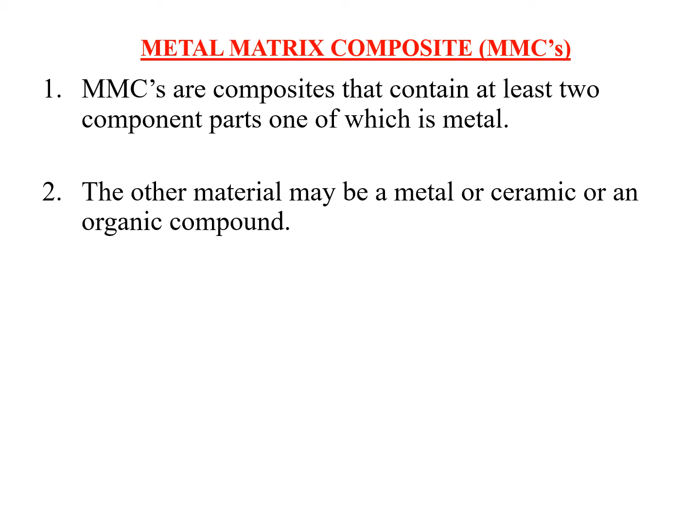So MMCs are composites that contain at least two component parts, one of which is a metal and the other material may be a metal or a ceramic or an organic compound. So it is made up of dispersing ceramics such as oxides, carbides, or metals like lead, tungsten, and a metal matrix which is usually aluminum, magnesium, iron, cobalt, or copper. Apart from this, most metals and alloys can be used as a matrix for this type of composites.

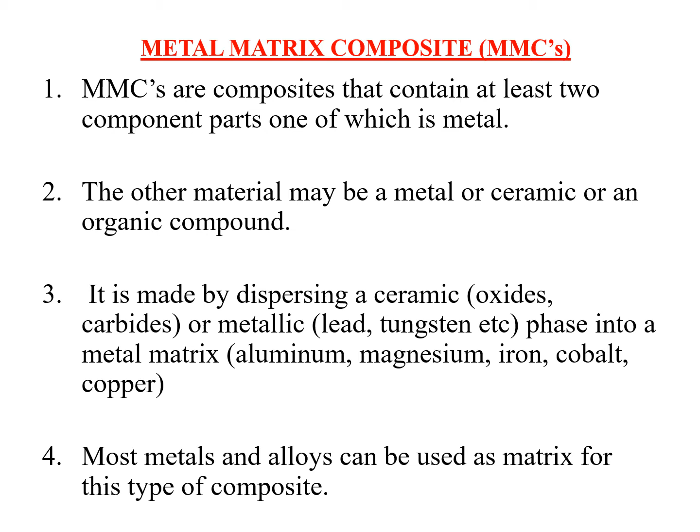So we have already studied what exactly we mean by matrix, what is reinforcement, and what is interface. So I hope you remember what exactly we mean by matrix.

So next are the properties of metal matrix composites. So MMCs offer properties such as higher specific strength, stiffness, and higher operating temperatures. Higher operating temperatures in the sense that when the temperature of the component in which the composite material is working is more, then also it will not change its properties, hence we term it as higher operating temperatures.

It has a very low coefficient of thermal expansion. So thermal expansion is nothing but the tendency of matter to change its shape, area, and volume in response to change in temperature. So here these composites will not change their shape, area, and volume when the temperature is changed, hence it will maintain its properties.

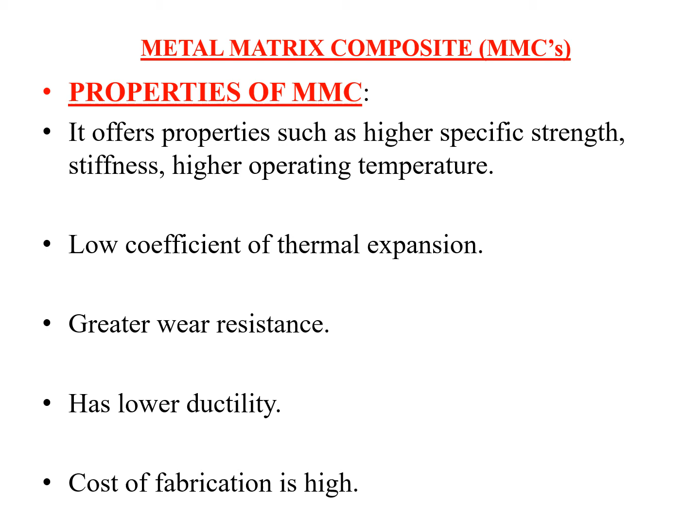It has a very good wear resistance. So whenever these types of composites are used wherein it comes in contact with another material where it is sliding or rotating inside a hub or a bush, then also the wear and tear rate is very less. It has a very low ductility, and the cost of these metal matrix composites is a bit higher as compared to other composites.

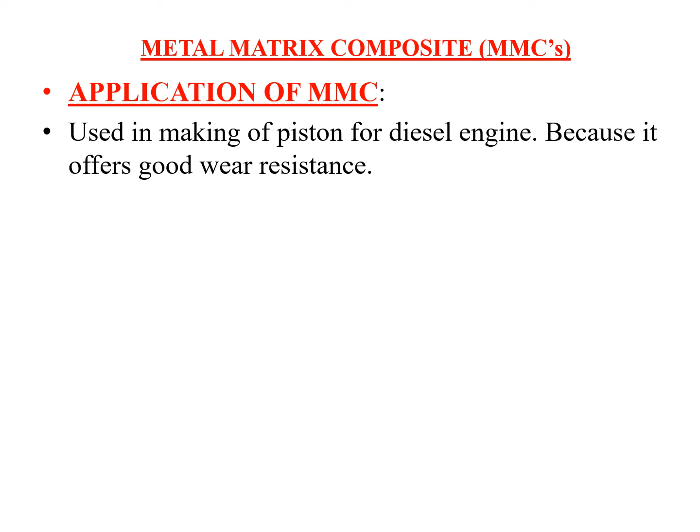Now we shall see what are the applications of MMCs, that is metal matrix composites. So these are used in making pistons for diesel engines, as the MMC piston offers very good wear resistance and strength at higher temperatures as compared to the traditional cast iron piston. So usually in the older engines or diesel engines we had pistons made up of cast iron, but nowadays we have metal matrix composites being used to make the piston because it has a very good wear resistance.

So metal matrix composites possess a very high strength and specific stiffness, which can be used in applications where weight saving is a vital factor. For example, in robots, high speed machineries, and high speed rotating shafts for ships or for land vehicles.

So MMCs are also used in automotive engines and brake parts due to their good wear resistance and also high specific strength. They are also used in lasers, precision machineries, and electronic packaging due to the tolerable coefficient of thermal expansion, and also they have a very good thermal conductivity. So these MMCs also find applications in spacecraft structures, missile structures, and fighter aircraft engines and their structures.

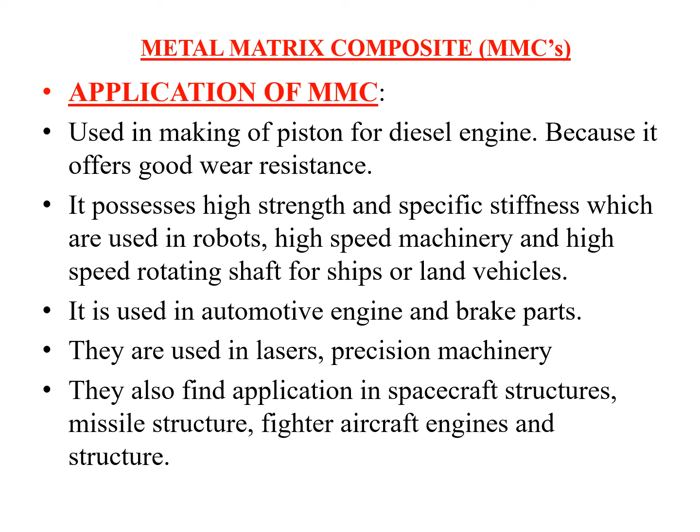So now we shall see the general properties of composites, which includes metal matrix composite, fiber reinforced composite, ceramics; it includes all the composite materials together. So we are speaking in general. What are the properties of composite materials?

So these are light in weight and these have a very excellent specific strength and stiffness. These have a very high strength to weight ratio. It has a very excellent spring back property with resilience. It is non-corrosive and resistant to chemicals. So these composites are chemically neutral, you can say, means it will not react to any chemical.

It also has very good weathering properties. So weathering properties in the sense, whenever there is a change in temperature, humidity, or whether it is raining, whether it is peak summer, then also the properties of these composites will not change. So we are talking about most of the time mechanical properties which will not change due to different weathers.

It also has fire resistance, hence it is used in most of the cars and automobiles or bike manufacturing. So the engine has a very high temperature, and we require components which are fire resistant, because there are chances wherein there might be fire hazards.

And also these have a very low thermal conductivity. Means what? This is not going to transfer heat from one point to another point. So if we make an engine from composite materials and the temperature inside the engine is very high, it will not transfer that heat outside the structure. Hence it has a very good thermal insulation.

So now we shall see in general what are the different applications of composite materials. So the first one is the aircraft industry. So in aircraft industries since the 1960s, all the aircraft parts such as fairings, spoilers, flight controls are made up of composite materials, since the use of composites saves weight over aluminum parts.

So before, 80 to 90% of components of aircraft were manufactured from aluminum, which would increase the weight of the aircraft. So hence after 1960 we started using only composite materials, which has drastically reduced the weight of the aircraft, and hence it is going to also improve the mileage, you can say, or the efficiency of an aircraft, because its weight is very less.

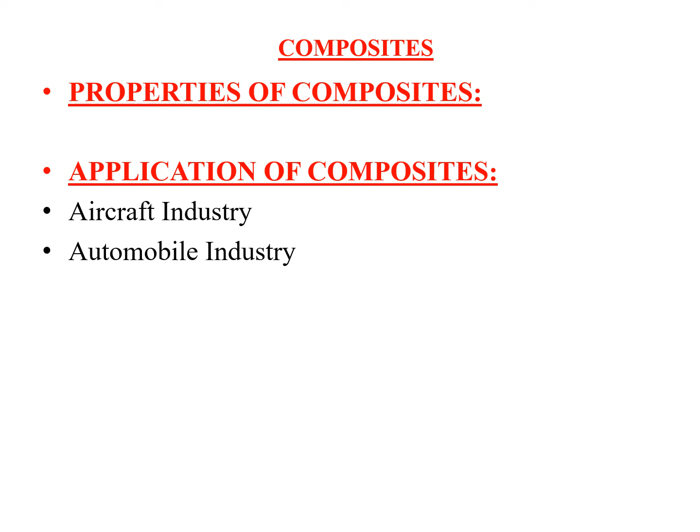Next one is the automobile industry. So in the modern automobile industry, composites are used to make the vehicle lighter, safe, and more fuel efficient. So car parts such as front ends, tail doors, cross car beams, side doors, seatings, hoods, bonnets, fuse boxes, headlamps, engine valves, and leaf springs, etc. are made of composite materials by many car manufacturers today.

The next one is sports equipment. So in sports equipment, composites find application in badminton rackets, tennis rackets, golf sticks, hockey sticks, softball bats, table tennis bats, light boat structures, helmets, climbing ropes, high jump poles, skis, snowboards, and many other applications in this section.

Next one is the construction industry. So polymer composite materials have been used by the construction industry, where non-load bearing applications like trimmings, kitchenwares, vanities, and cladding are done by these types of composite materials.

The next very important application is the biomedical industry. Composite materials are widely used in orthopedic applications such as bone fixation plates and hip joint replacements. We have bone cement and bone grafts, and they also find use in dental applications such as preparation of crowns, repair of cavities, or entire tooth replacement.

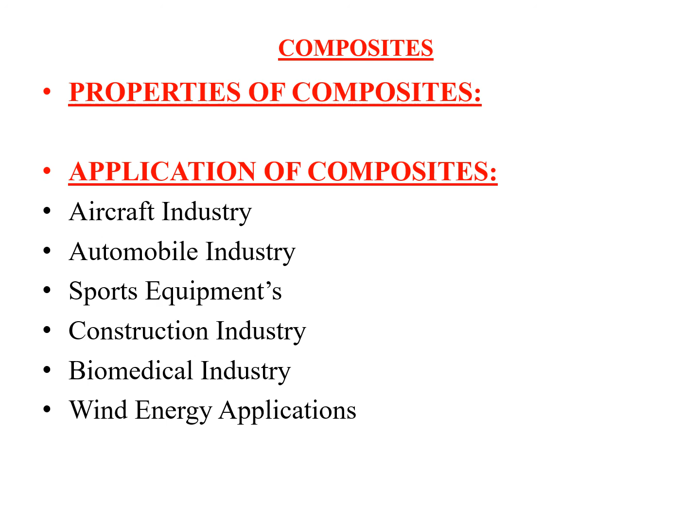Next one is wind energy applications, wherein all wind turbine blades are manufactured from composite materials nowadays because of their light weight. Then the next important one is marine applications. Composite materials are used extensively in construction of ships and marine structures, since composites have a very high stiffness and strength by weight compared to most other materials like steel and aluminum. So composites are used in boat hulls, minesweepers, ship structures, etc.

The last one is military applications. Here composites are used in submarines, armored vehicles, bulletproof vests, and all military aircraft are nowadays manufactured using composite materials. So these are a few of the applications of composite materials. Other than that, we have many other applications where composites are used in day-to-day life. So this is all about composite materials.